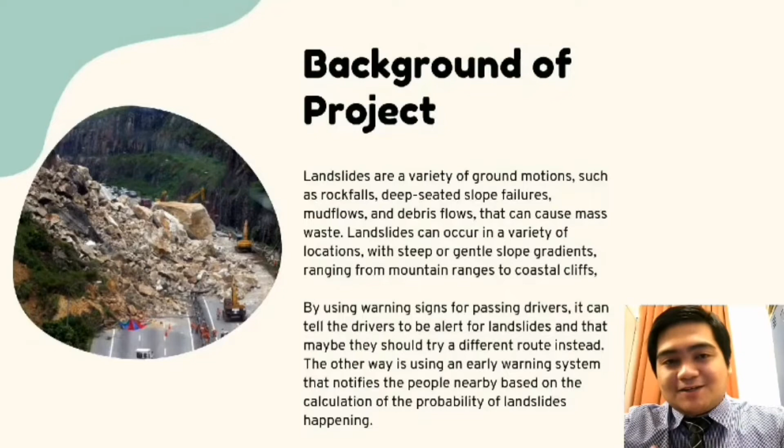A landslide is mainly caused by gravity, but there are additional elements that alter the slope stability and establish a certain slope condition that makes it very vulnerable to failure. It is because of this, people have invented ways to warn nearby people of the area so that they would avoid casualties. Ways such as using warning signs to alert passing drivers about the area having a high probability of a landslide occurring, or using an early warning system that notifies people around based on the calculations of a probability of a landslide occurring in that nearby area.

Aim of project. The aim of this project is to design an alternate landslide alarm system that warns people about landslides occurring in that nearby area. Objective of project. The objectives of this project are: first, to create a simulation of a landslide detection system with the piezoelectric method. Second, to understand how piezoelectric sensors work.

Scope and limitation of project. The scope of the project should be given as a guide to ensure that the project does not deviate from the goals to be accomplished anytime it is implemented. This project does not go beyond its aims and functions. First, the siren that can produce a sound of over 140 decibels will be scaled down to 70 decibels using a piezo buzzer for the simulation.

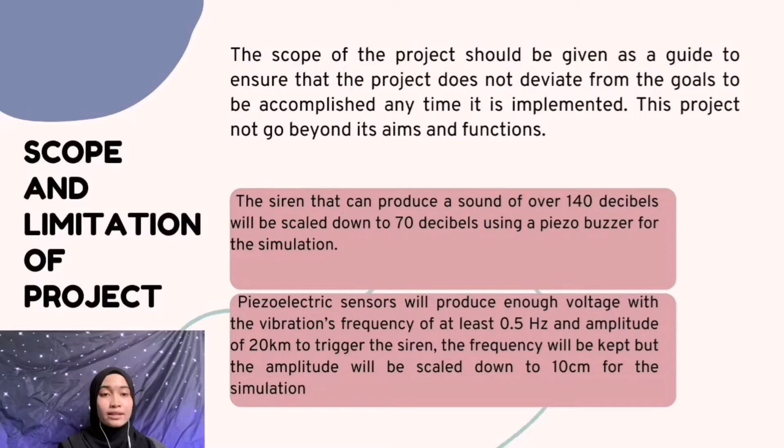Second, piezoelectric sensors will produce enough voltage with the vibration frequency of at least 0.5 Hz and amplitude of 20 km to trigger the siren. The frequency will be kept but the amplitude will be scaled down to 10 cm for the simulation.

Problem background and significance of study. Landslides are one of the disasters that happen without warning, making it very difficult to avoid. In this modern era, landslides are getting more common. This is because humans have increased the chances of landslides occurring through activities such as mining, constructions of roads and buildings. Ideas such as using warning signs or early warning systems to notify people nearby about a landslide occurring have been implemented. But still, there are people who lost their lives because of landslide incidents.

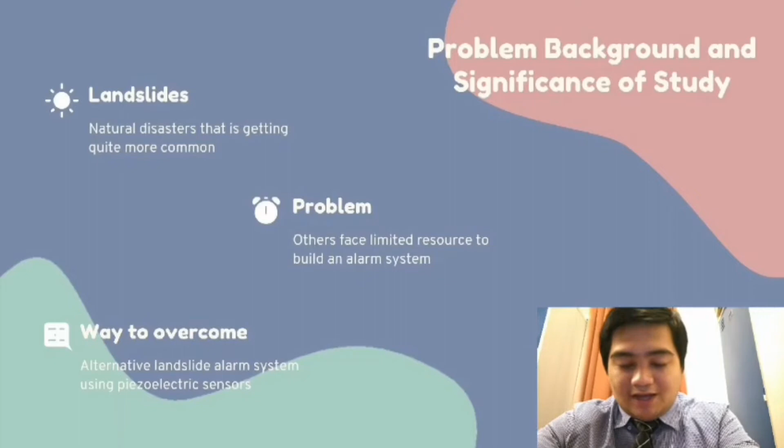This could be the problem of how some people have limited resources to build an effective landslide warning system, especially for people who live far away from cities. It is because of this, our group's goal is to design an alternate landslide alarm system, one that is easy to assemble and low price. This is achieved by using piezoelectric devices. Piezoelectricity is the electric current produced by applying force or vibration to a piezoelectric crystal, which is a crystalline material that has no inversion symmetry.

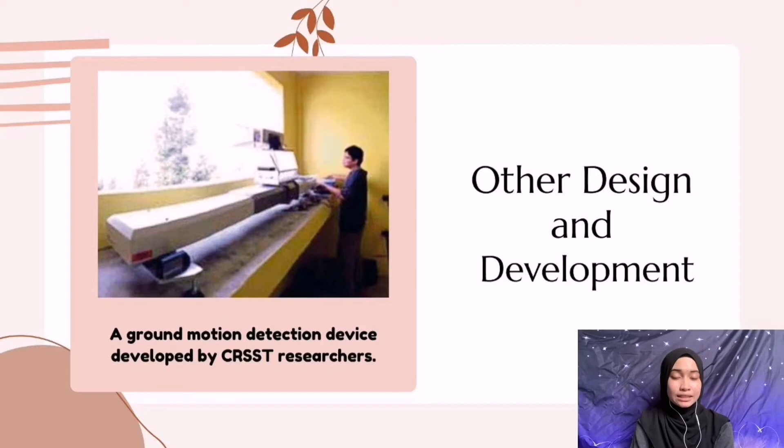Research papers. First, researchers from the Center for Remote Sensing and Surveillance Technologies, CRSST, Multimedia University MMU Melaka, created a ground motion detection device. Second, Zentronic Enterprise Company has created a landslide alarm simulator.

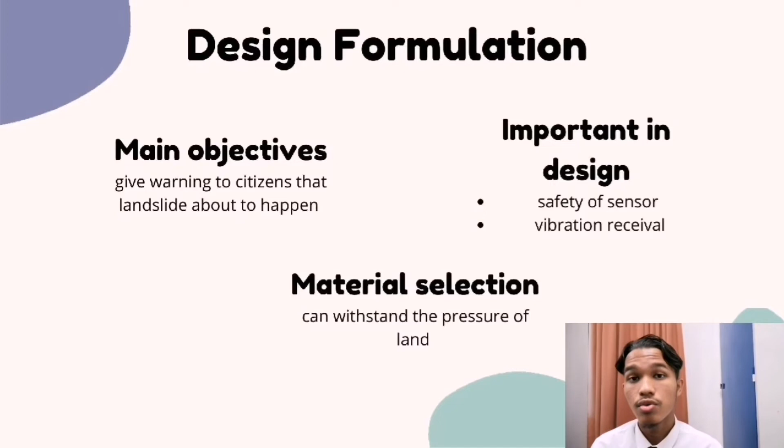For design formulation, our main objective in developing this warning detector is to give warnings to the citizens in the area of a landslide range that a landslide is about to happen. The energy from the landslide vibration will activate the siren so citizens could act fast to save their lives. The importance of this project is the safety of the sensor being buried underground. Vibration can be received in all directions due to this design. Strong material must be chosen in order to withstand the pressure of the land and to make sure the component was safe underground.

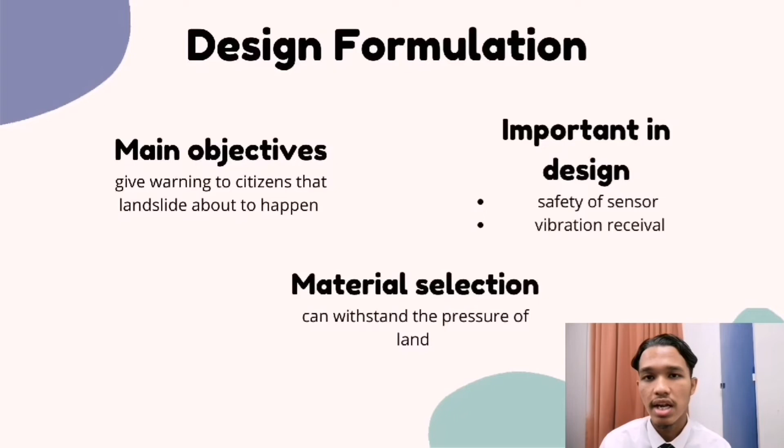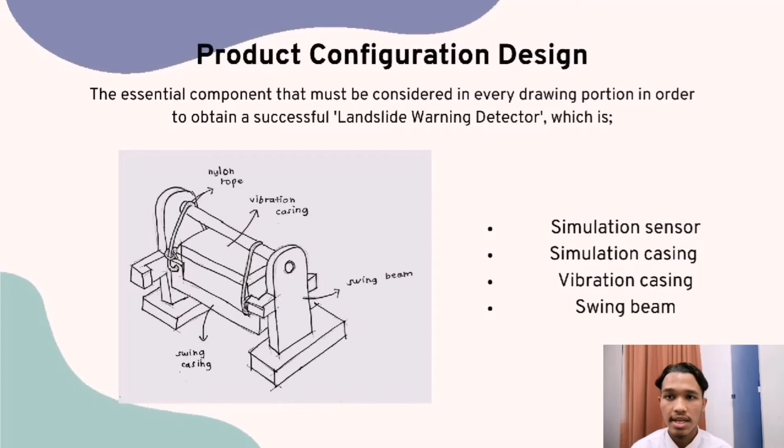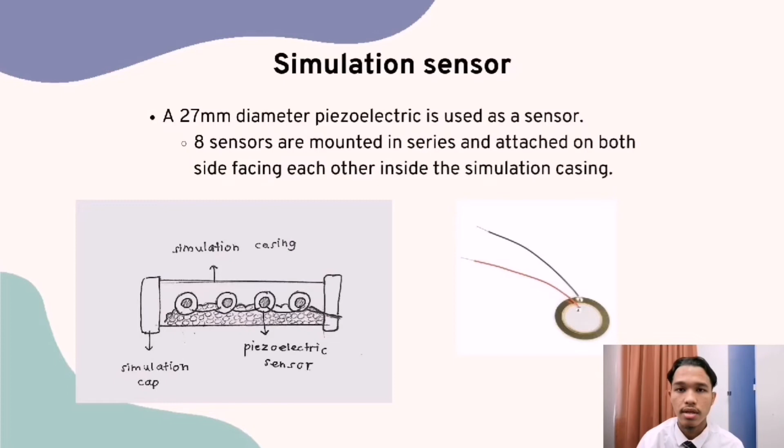For product configuration design, 4 parts must be considered to make a perfect drawing based on a final design sketch. The 4 products, as I mentioned earlier, were simulation sensor, simulation casing, vibration casing, and swing beam. Firstly, for the simulation sensor, we will be using a 27mm diameter piezoelectric as the sensors. A total of 8 sensors are mounted in series and attached based on the left sketch on the slide.

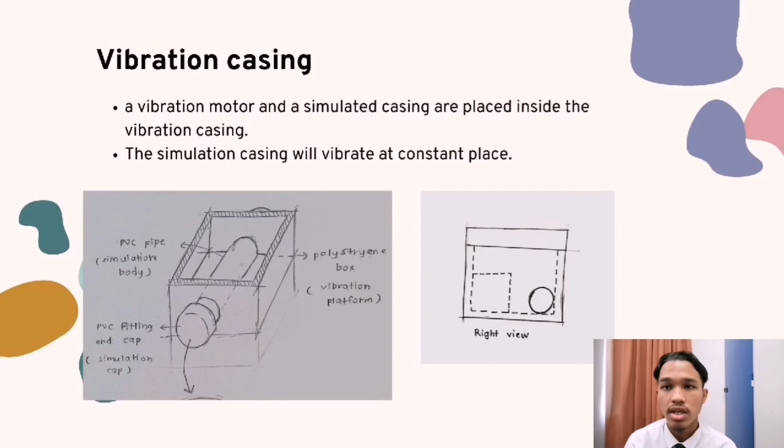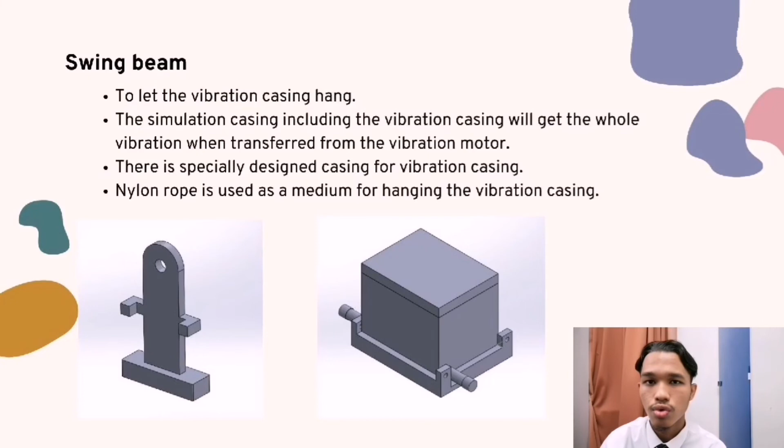Lastly, the swing beam was used to let the vibration casing hang. Due to that, the vibration casing, including the simulation casing, will get the whole vibration transferred by the vibration motor. There is a specially made casing for the vibration casing, and nylon rope will be used as a medium to hang the vibration casing.

Fabrication and tool equipment. For this project, we had already specified our scope of work to produce a prototype of a landslide warning detector. All the materials that have been chosen are suitable for us to purchase, as we put a price limit on manufacturing cost so that it will not be very high. In terms of material selection, we agree that all of the materials are high quality and hard to damage if there is an external force applied to the prototype.

Even though we use a hot glue gun for the joining process, which is generally not as strong as welding, we believe that it will stay strong and steady for some period, as we expect it will last for 6 months. For the joining process, we use a hot glue gun as the main connecting tool and others such as cutters and scissors to shape. The hot glue gun is used to combine the piezoelectric and the body of the PVC pipe, and weld one iron to another to be used as a place to hang the landslide warning detector platform so that it is lifted.

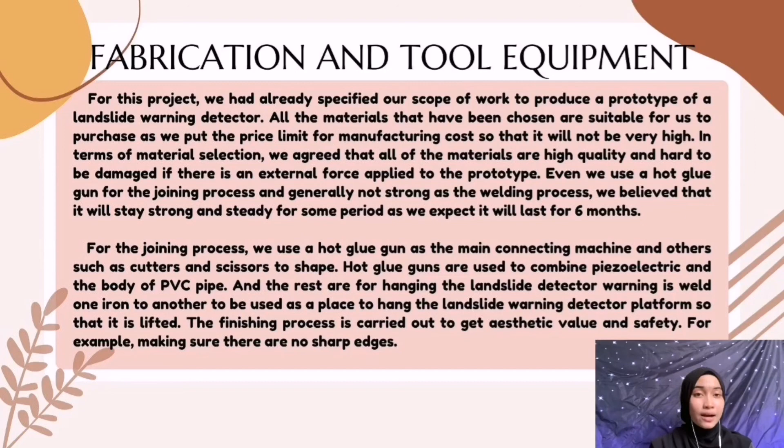The finishing process is carried out to get aesthetic value and safety. For example, making sure that there are no sharp edges.